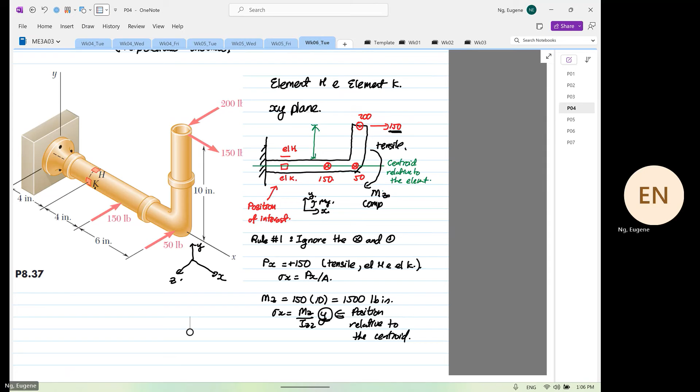Now, I'm going to view differently now. This is my Y. This is my Z. This is rotation about X. So now we're going to have a different view. All right? I'll draw it bigger.

Some of these reviews I get, I cannot stop laughing, okay? So I'm not angry. It's just I need some comedy in my life. My daughter was trying to teach me to play violin, and she said, "Dad, you're so slow." Yeah, I know, and I'm feeding her. I told my wife, let's stop feeding that little twit. But anyway, my wife said, no, you're crazy.

So what you see over here is the front view. You have 150 over here, and you have a 50 over here. And then you have a 150 over here. And then you have something over here that's 200. Okay. The green is the position of our centroid. Then as usual, we put in our elements. So this is our element H, and this is our element K. So if we do summation of forces in the Z direction, it is equal to 0.

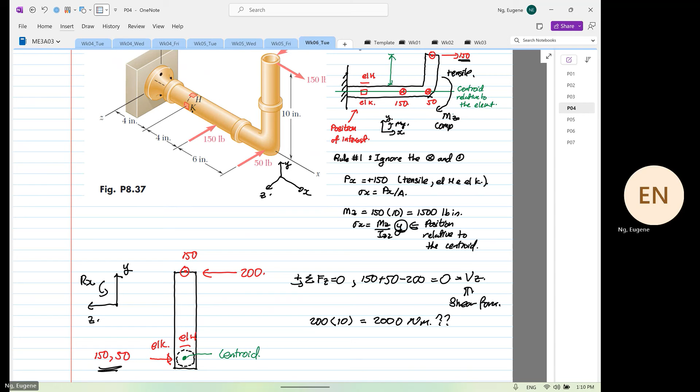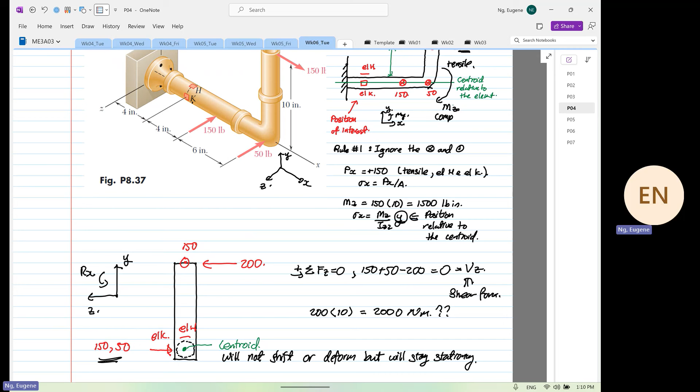Over here, the centroid did not shift or deform, but was what? Stayed stationary. Now, when is it a bending moment? For a bending moment, the deformation has two patterns. What are they? Smiling face or what? So for this case, it is a moment. It's obvious that this is a moment because of the deformation.

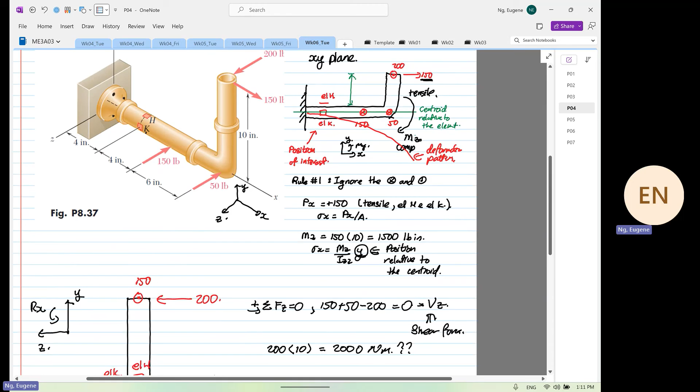Are we clear? That is how you differentiate whether it is a moment or a torque. Okay. You don't need to memorize this, for crying out loud. As I said, you can use the moment vector, but I want you all to visualize. If you cannot visualize this for this course, then you have to be looking for places like University of Waterloo or Toronto to take this course. Visualization is going to be critical in this course. Are we clear?

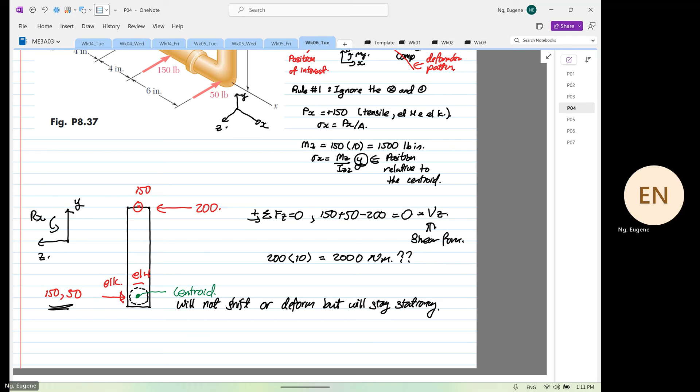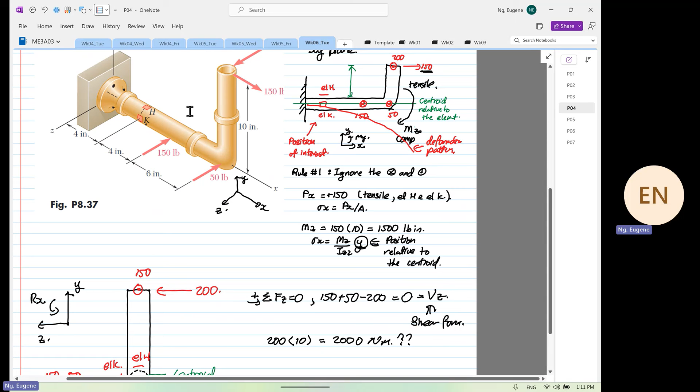Okay. Now, let's look at another point of view. Let's look at a view of the XZ plane. So now we are going to view this in your XZ plane. So in your XZ plane, what you see is this is the wall, and this is what you see, and this round thing down here. And then from here, again, put in your element.

Once you see all these things drawn on the wall, don't tell people that you know the prof, okay? I might be in trouble. Are we clear? No one is answering means they are going to throw me under the bus. I knew it.

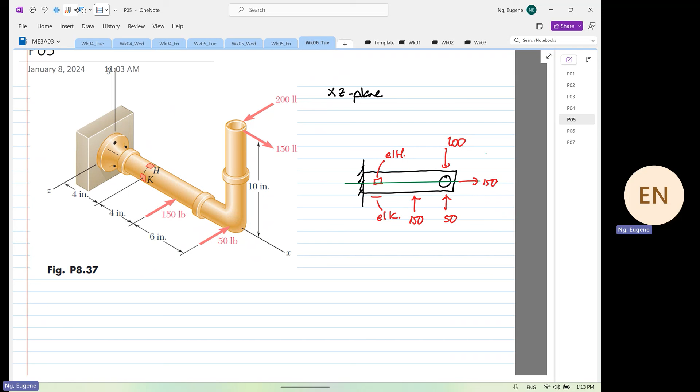And then from here, we put in our forces: 150, 50, 200, and we have our 150, right? And then from here, this is our X, this is our Z, and then this is the rotation about Y, okay? So now, whatever is anti-clockwise, we are going to find the summation of moments in the y-axis at either point H and point K.

Now, question for you. The forces are perpendicular to the what? To the centroid. I repeat again, the forces are perpendicular to the centroid. So when that's the case, the moment is taken to the element. You see what's different now, yes or no? So this will be equal to 4 multiplied by 150 plus 10 multiplied by 150, minus 10 multiplied by 200. So this is equal to 100 pound inch.